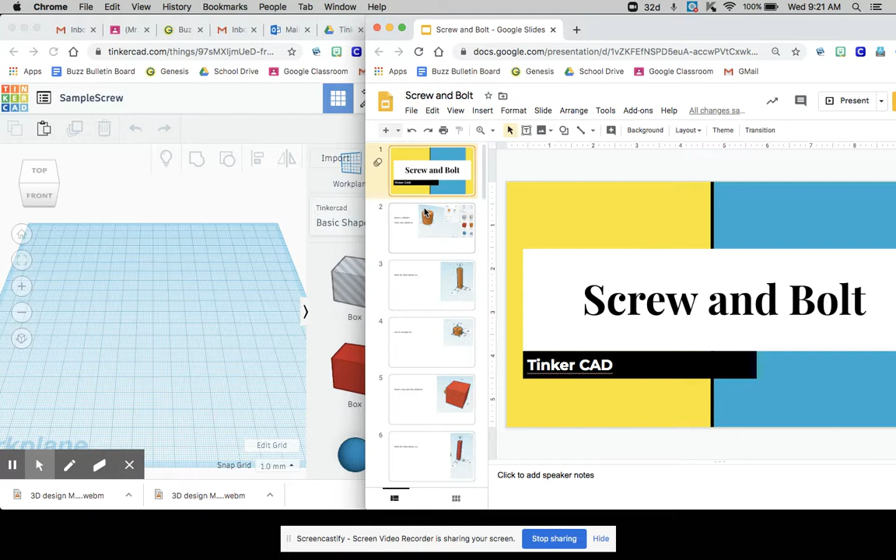The cool thing about this one is if you do it the right way, you can actually 3D print this fully functional, which is pretty neat.

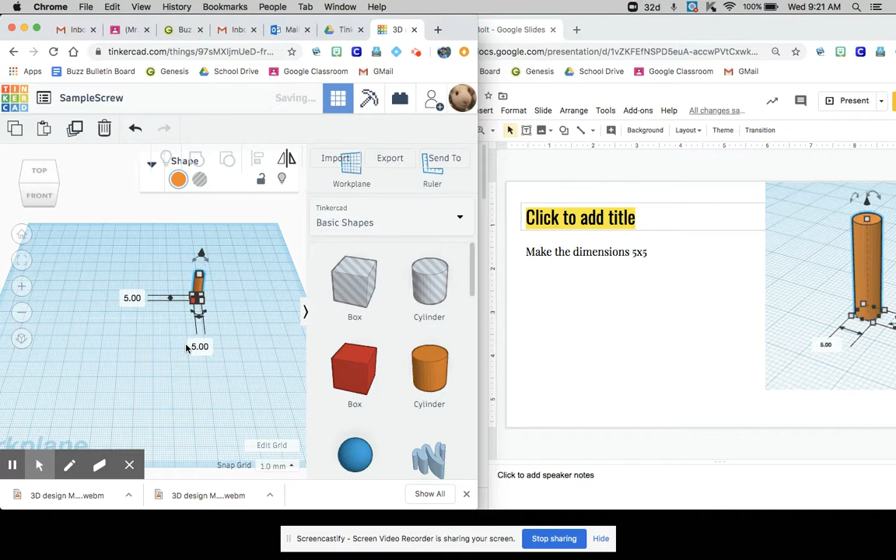So first thing, it says insert a cylinder onto your platform. I'll be doing a screen share of how to do it. Make the dimensions 5 by 5 as opposed to the 20 by 20 they naturally start off as. Give it a height of 3.

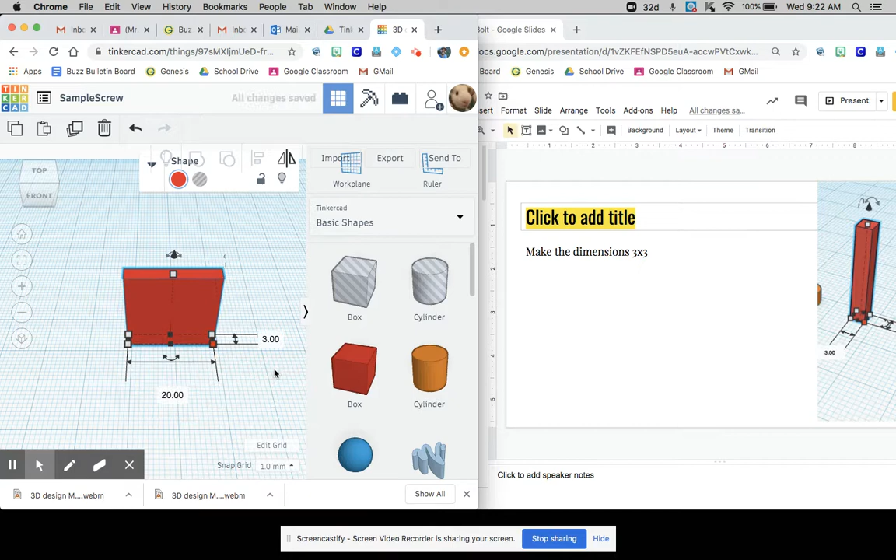Insert a box onto the platform. Make the dimensions 3 by 3. And then we give this a height of 1. So make this nice and tiny.

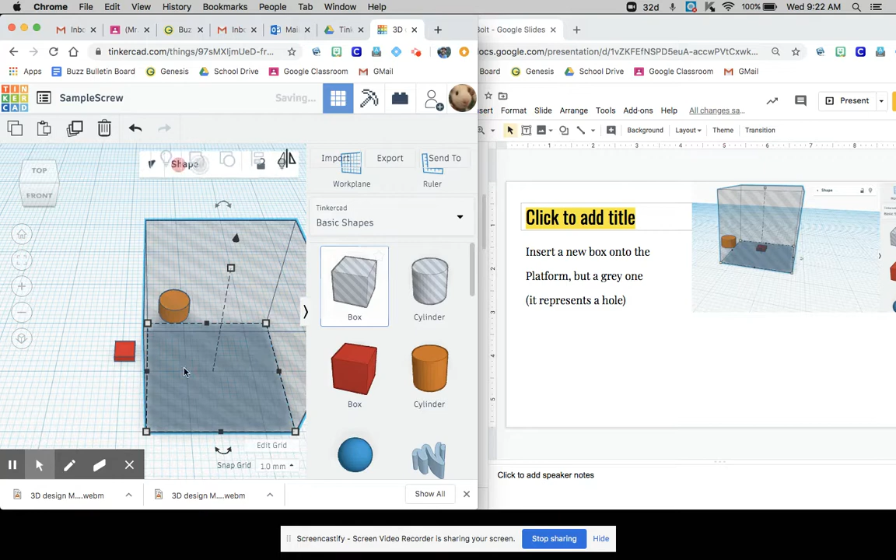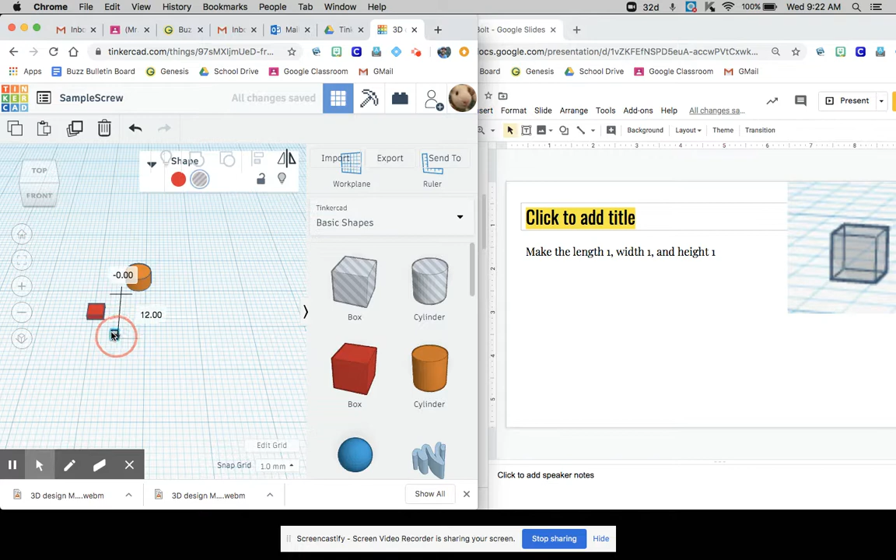Insert a new box onto the platform, but a gray one, so pretty much a box, but one that is a hole. Make these dimensions 1 by 1 by 1. Back up a little bit - I'll give it a height of 1 first, and then length and width also 1. Remember, you don't just click and hold the white square, you want to click it really quick to get the numbers and click the numbers.

Now it says copy and paste the box so that there are 4 of them, and put them at each corner of the red box. You can use the align tool, but it can also get a little complicated if you do that. So we made it so there's 4 of them - really, you could just take them and put them in the corners.

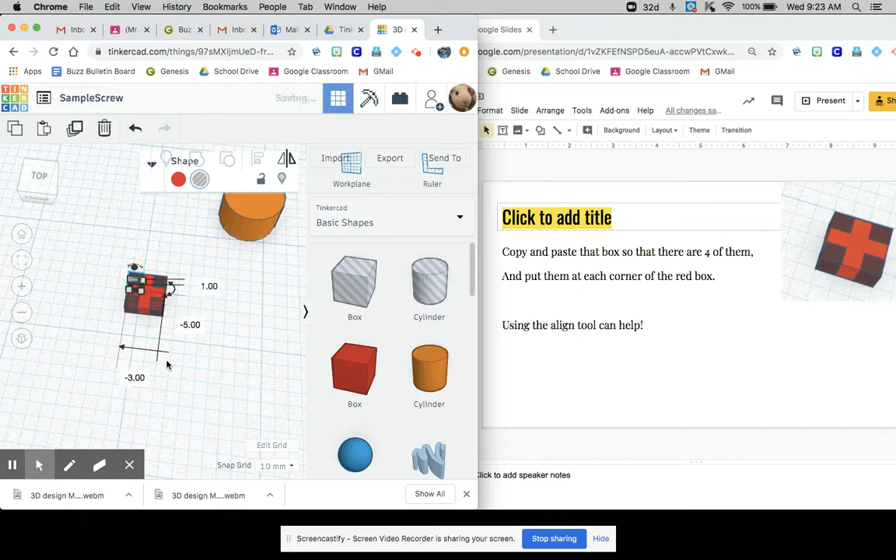Okay, now you highlight everything and group it. So you highlight the whole thing, and then at the top you press group. Now you're left with kind of like that red cross sign. But now you change that whole figure into a hole.

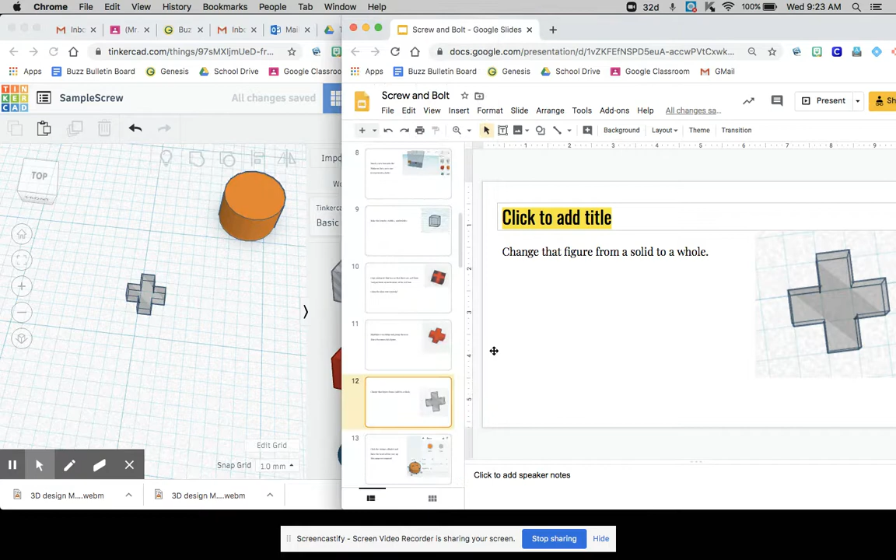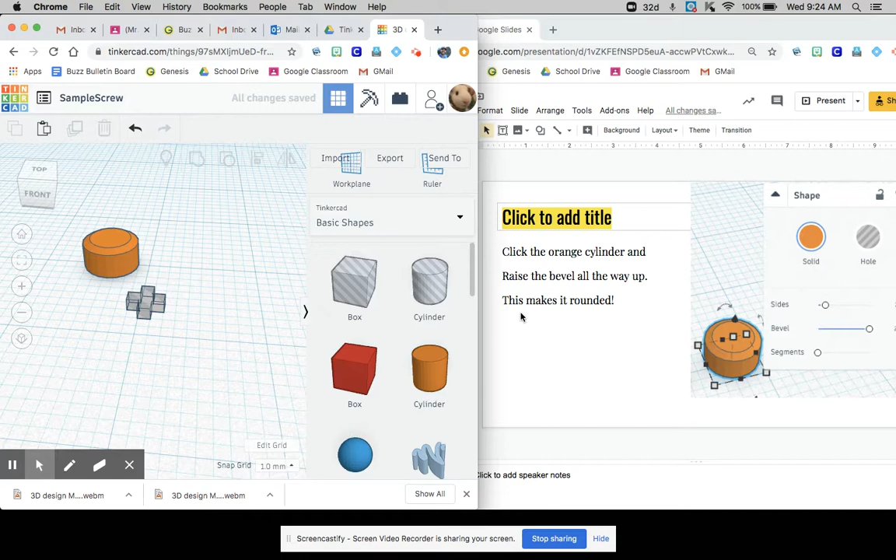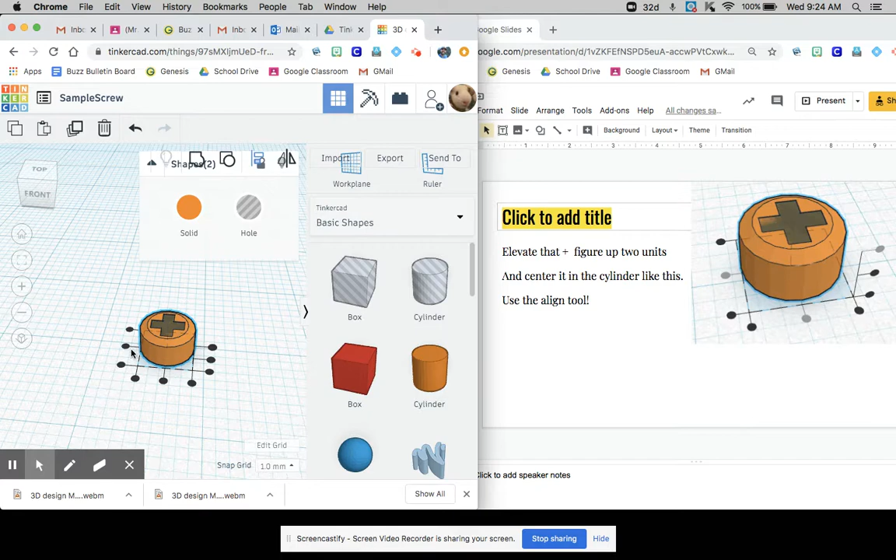Then you elevate that plus figure, which is the one that we made into the hole, and center it in the cylinder like this. Use the align tool, and you want it so that it's just barely - let me see if 2 works. Yeah, 2 works perfectly. You can, just to check, align everything, which is by clicking those middle ones.

Then you group it. So highlight everything and group it. Cool.

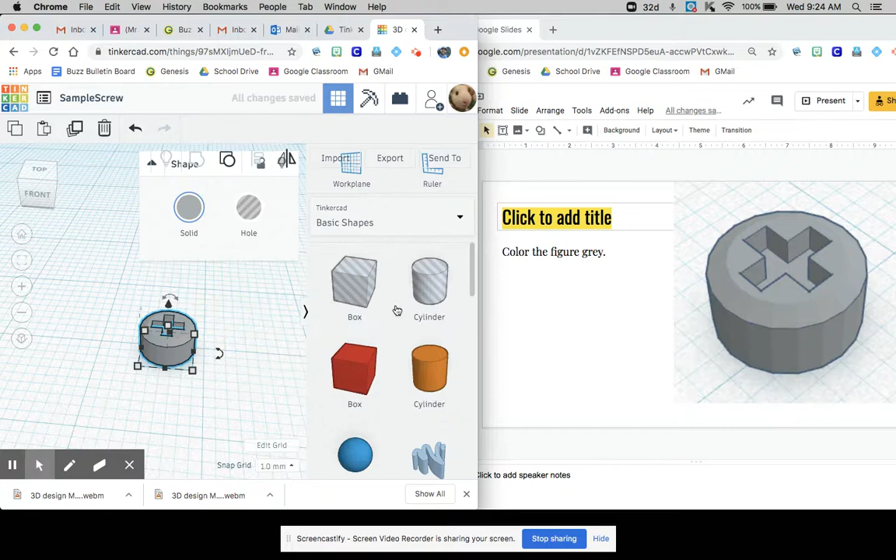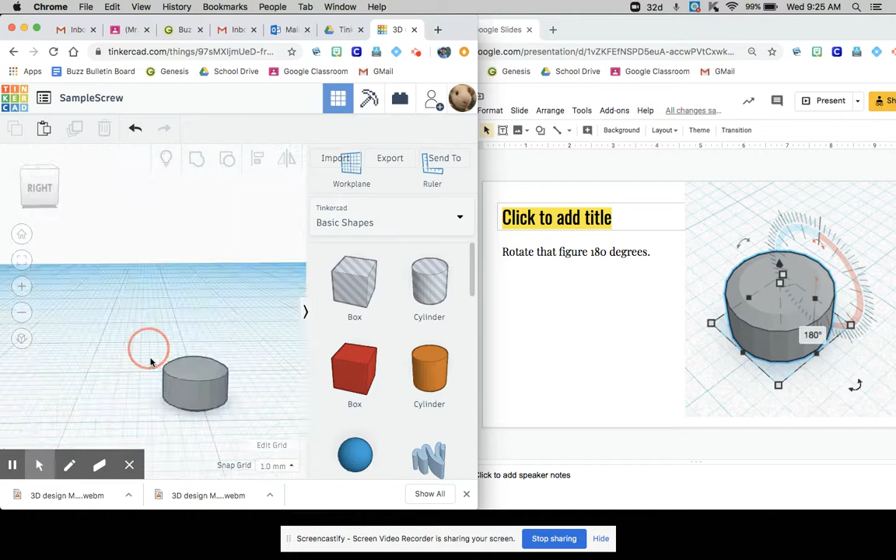You're going to paint this gray. So we got a gray now. And rotate that 180 degrees, pretty much so that instead of that plus sign being at the top, you want it to be at the bottom. We are making a screw and bolt, so this would be sort of like the Phillips head screwdriver part.

Okay, in featured shape generators, insert an ISO metric thread. So we're not going to be in basic shapes anymore - we got to go to featured shape generators. We go to ISO metric thread.

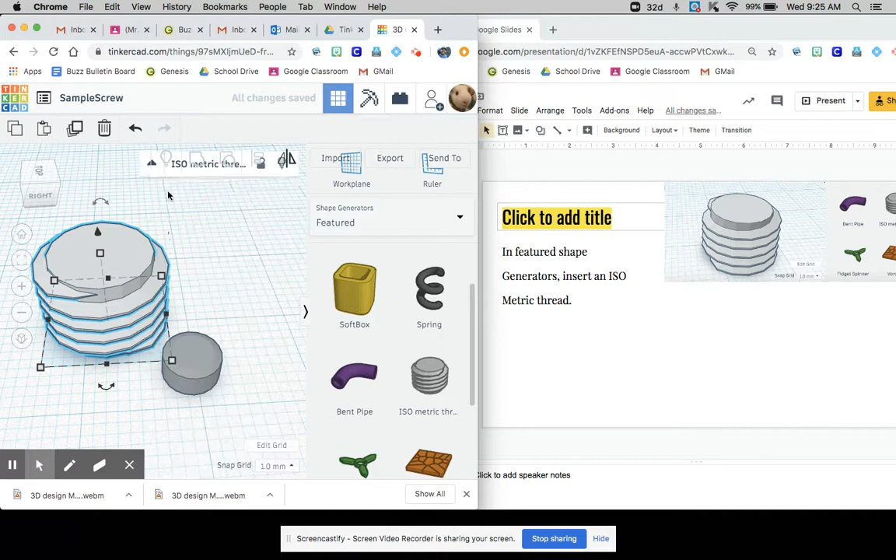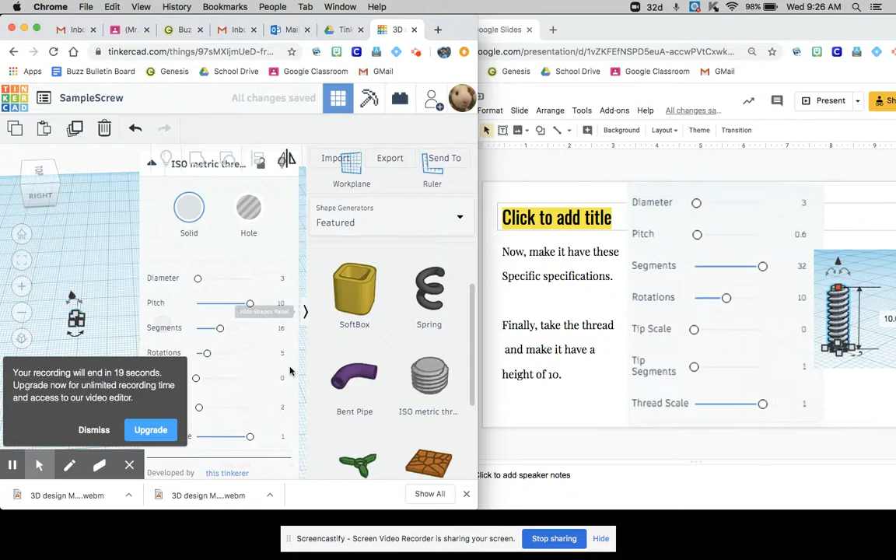I'm going to get rid of that information, although we will definitely need it soon. All right, now make it have these specific specifications. So now we actually do need that - the arrow says diameter, and you can just click the numbers here. Diameter 3, pitch 0.6, segments 32. Seems like some of the numbers didn't take. Rotations 10.